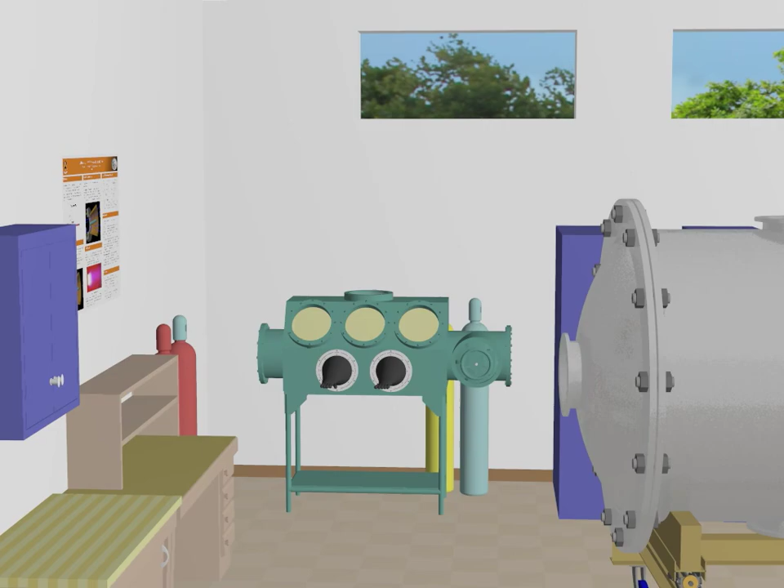I'm Will, and this is the second of 4 videos I've made summarizing the projects I've worked on here at Princeton. This video focuses on the thruster that I use for my research, as well as the thrust measurement system.

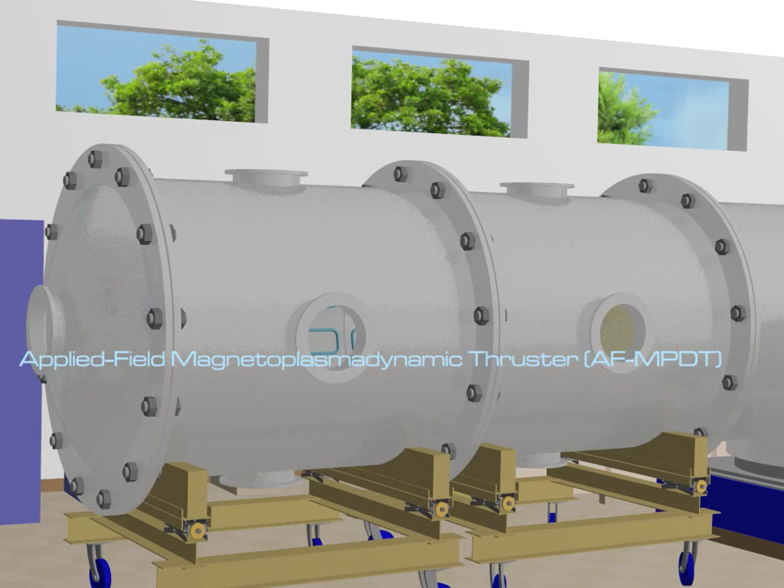I work on a type of high thrust density device known as an applied field magnetoplasma dynamic thruster, or AF-MPDT, sometimes also referred to as an applied field Lorentz force accelerator. But basically, it's a plasma cannon with a force field nozzle. We'll start by taking a look at how this thruster works, and then I'll tell you about some of the research I've done to determine how to make it work better.

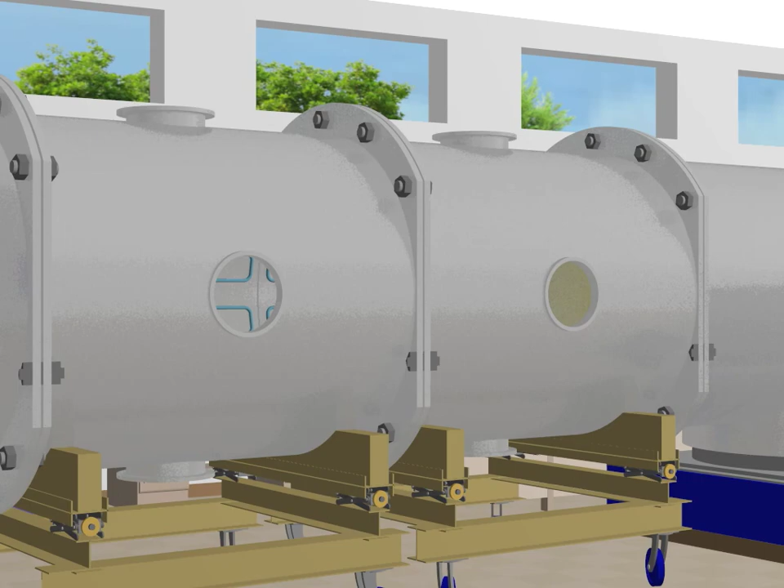Our thruster resides in a steel tank, and this material was chosen over fiberglass because we wanted to be able to handle as much as 100 kilowatts of power, and a lot of that power is going to heating the walls, which would melt fiberglass. You can see that the cooling lines are welded to the interior to keep it from getting too hot.

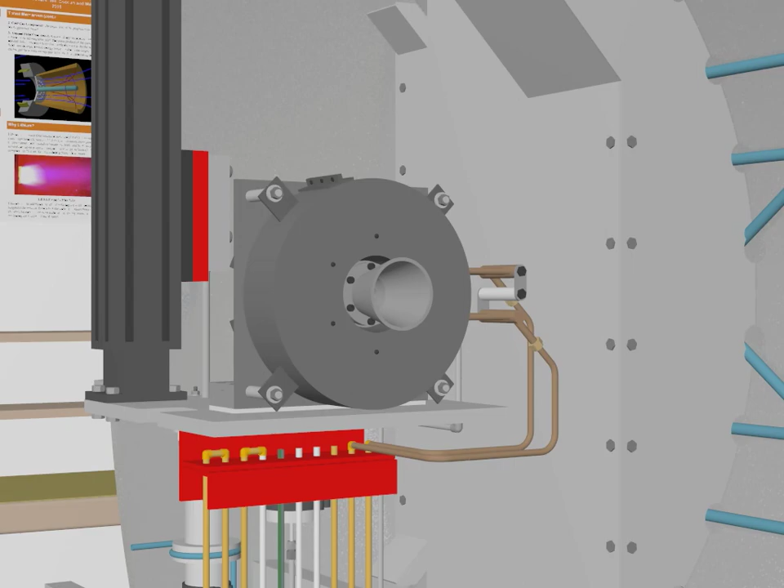I work with both lithium and argon propellants, but each requires its own thruster. This is the lithium Lorentz force accelerator, or LILFA for short. This is an electric rocket. The physical nozzle serves as the anode in the electrical circuit. The object in the center is the cathode. This particular cathode is known as a multi-channel hollow cathode.

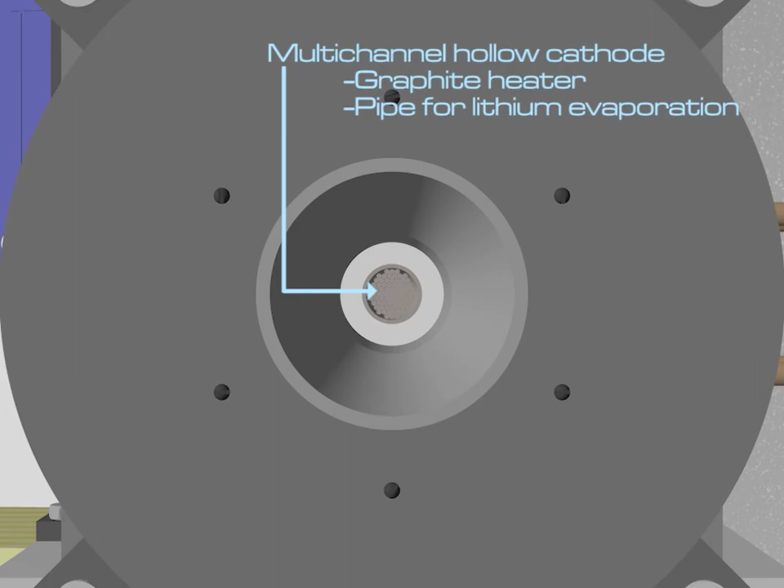Inside the cathode is a graphite heater, which causes the cathode to glow white hot before ignition. There is also a tube through which the lithium flows and where evaporation takes place before venting through the many channels. Both the anode and cathode are made of tungsten, since it has a higher melting temperature than any other metal.

Using lithium as a propellant is problematic for a researcher, since it is extremely hazardous, it takes a long time to clean up, and because it coats everything in an electrically conducting layer.

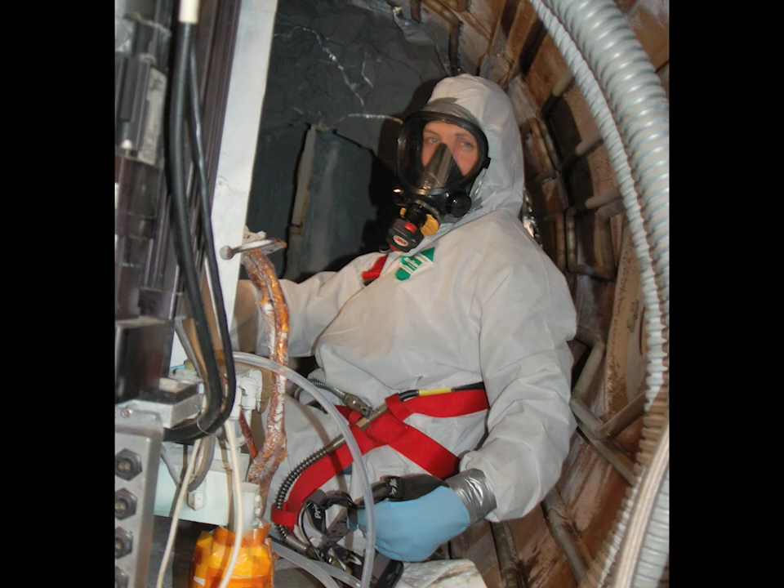But it offers an equal number of advantages for thrusters. In addition to having a low ionization energy, which means that more energy can go to thrust generation, it lowers the work function of the cathode. This feature is essential because without it, our tungsten cathode would melt.

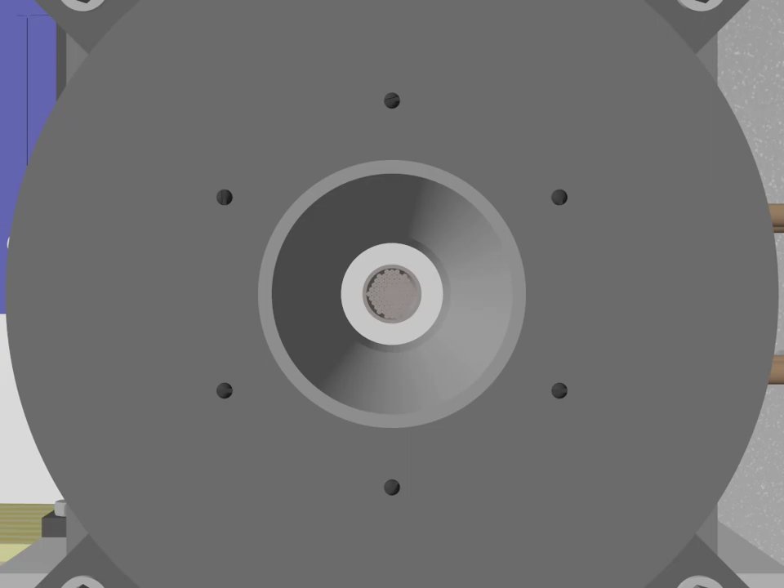How does the LILFA generate thrust? There are 3 different thrust generating mechanisms. First, just like in a chemical rocket, there is a hot gas expanding through a physical nozzle, generating the gas dynamic thrust component.

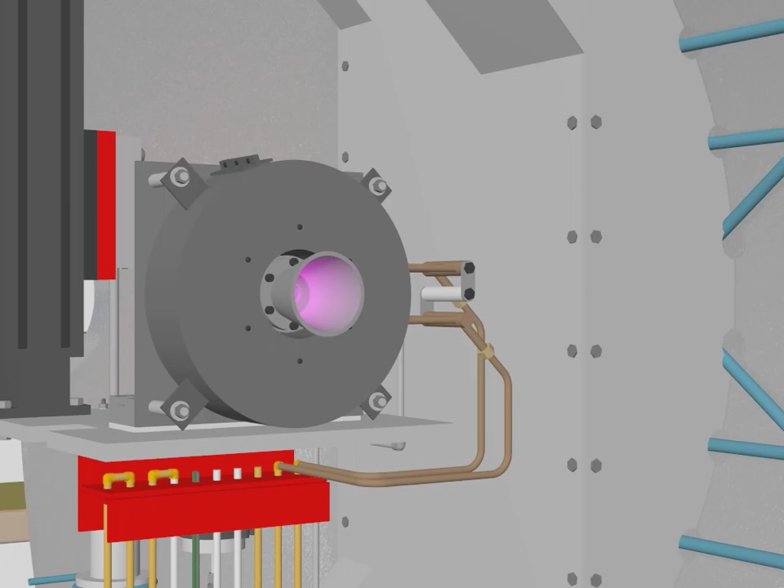When we strike an arc through the plasma and increase the current, it generates an azimuthal magnetic field. In this case, the Lorentz force, or cross product of the radial current and azimuthal magnetic field, is primarily along the thrust axis. This component of thrust is known as the self-field thrust, since it results from the self-induced magnetic field. You may have noticed the large cylinder surrounding the thruster.

This is a solenoid. It contains a copper pipe that has been twisted a number of times around the thruster. This pipe carries cooling water as well as large electric currents. These currents result in an axial diverging magnetic field. This is the applied field I referred to earlier.

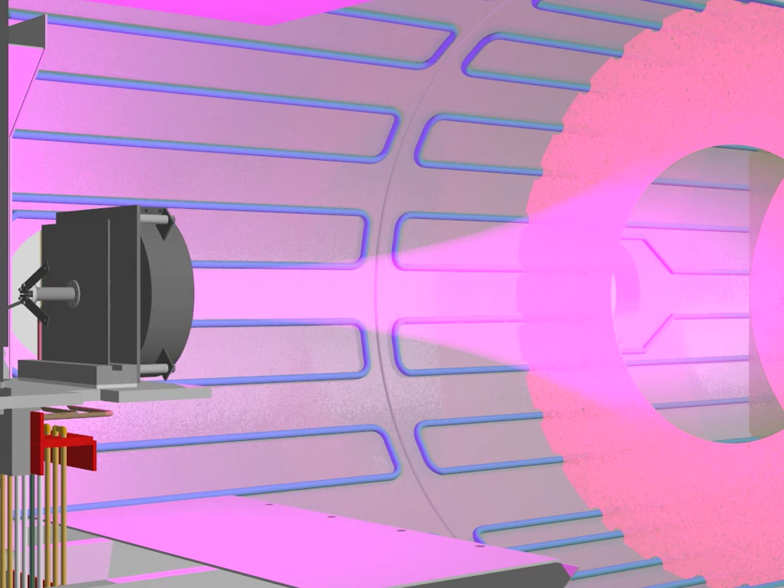It confines the plasma in what is known as a magnetic nozzle. You can actually see the boundary of this magnetic nozzle when operating at high magnetic field strengths.

In addition to extending the physical nozzle, the applied field results in a Lorentz force that acts to swirl the plasma. As the swirling plasma expands through the magnetic field, the rate of rotation slows in order to conserve angular momentum. In order to also conserve energy, that means the plasma must accelerate in another direction.

In this case, that is along the thrust axis, which results in the generation of thrust when the plasma detaches from the magnetic field. This thrust, along with any force resulting from Hall currents, is the applied field thrust component.

This last thrust component is the dominant one under typical operating conditions, and the one that has proven most difficult to model over the last 60 years of applied field MPDT operation.

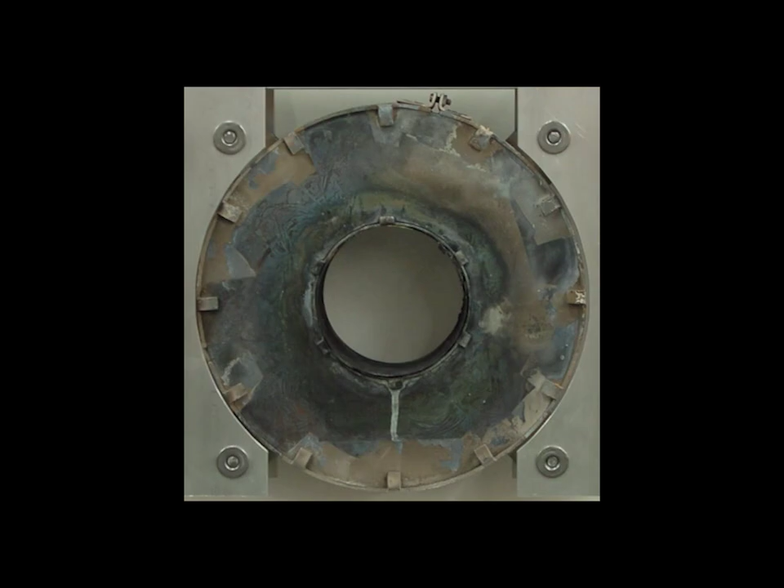We want a formula with which we can predict the thrust for a given power level, magnetic field, geometry, mass flow rate, and propellant species. We want this because such a model can be used to optimize the thruster for a given mission's requirements.

Many models have been put forward to date, and experiments suggest that thrust scales proportionately with the current, magnetic field strength, and anode radius under most conditions. However, prior to my studies here, all measurements in the literature were of the total thrust, which is the sum of all thrust components. Without perfect gas dynamic and self-field thrust models, it is therefore difficult to validate a model for the applied field thrust component from a measurement of the total thrust.

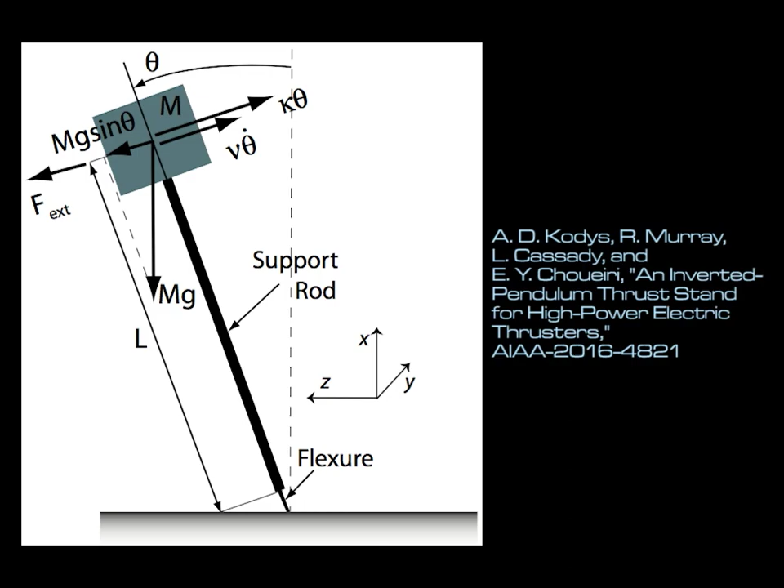I constructed a new thrust stand for the LILFA in order to make direct measurements of the applied field thrust component. This thrust stand operates on the principle of an inverted pendulum. When the thruster applies a force, the pendulum moves. I measure this motion and calibrate it against a known force to determine the thrust.

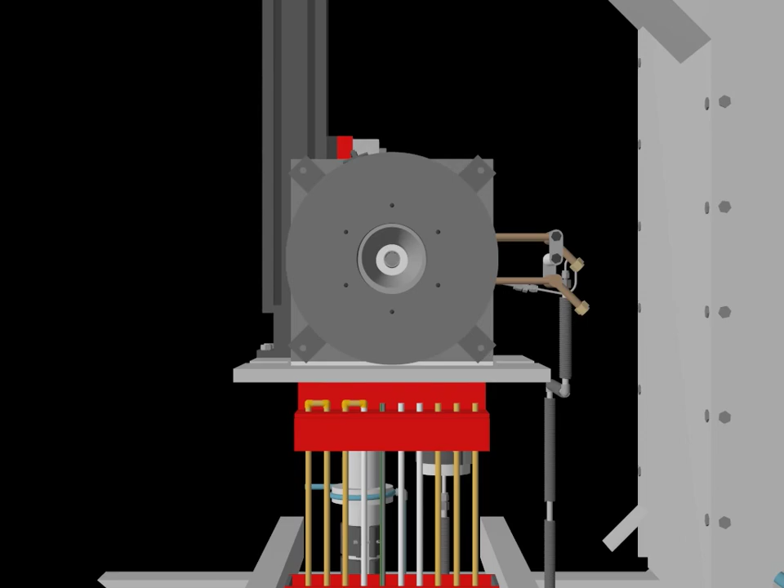In order to measure a single thrust component, I first fixed the thruster to the lab frame. Then I separated the solenoid from the thruster. Because the solenoid generates the applied field, the force resulting from that field must generate an equal and opposite force on the solenoid. The solenoid is then suspended from a structure supported by 2 copper pipes. These pipes carry all current and cooling and act as springs for the inverted pendulum.

Now, if I turn on the thruster with the applied field turned off, nothing happens. But if I increase the magnetic field strength, the applied field thrust component will cause the solenoid to deflect. I measure that deflection using both an LVDT and a proximeter, each of which is contactless.

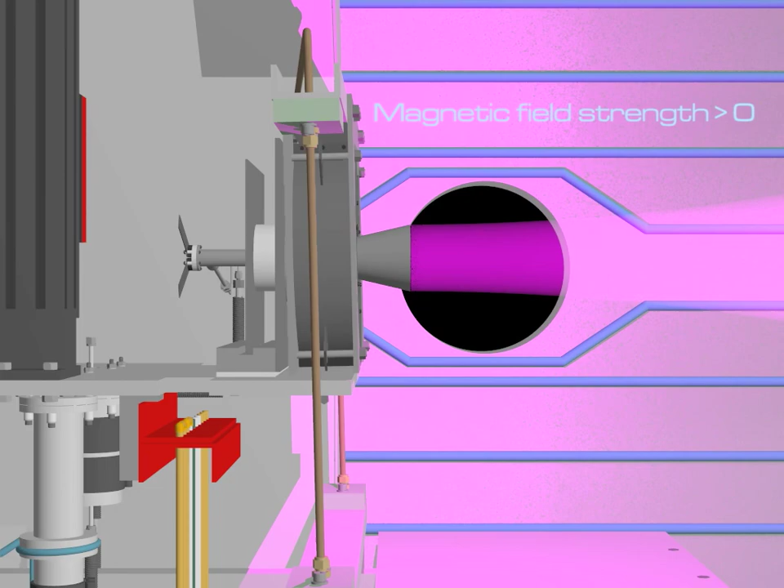In order to determine how that deflection corresponds to a force, we can apply a known force along the thrust axis. In this case, we have a thin wire traveling over a low friction pulley and down to a scale.

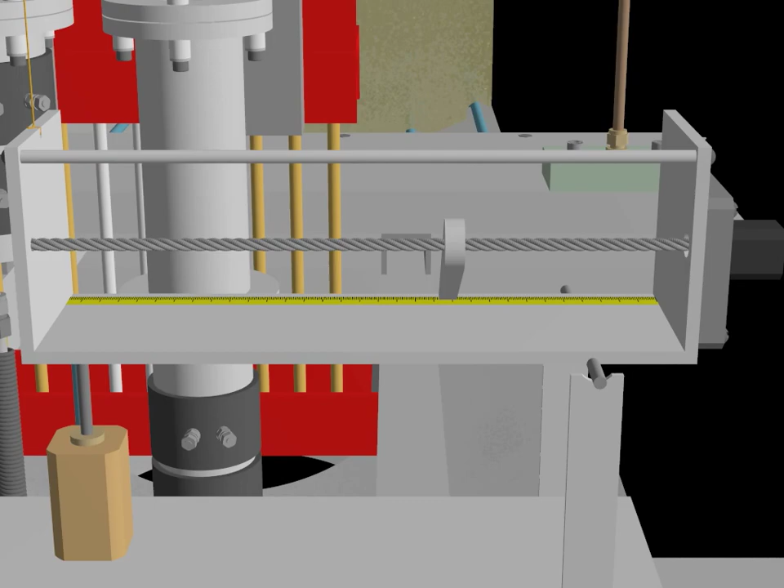That scale can be triggered by a remotely controlled actuator. The force applied to this scale is known as a function of the position of a mass, which is also remotely controlled, and which can be used to match the deflection found while firing.

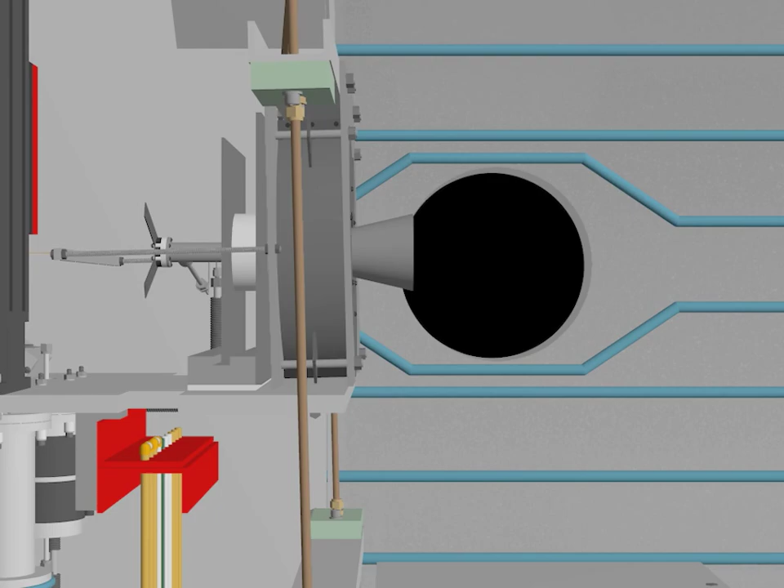That's an applied field thrust measurement in a nutshell. It's a little more complicated when you account for thermal drift and electromagnetic tare forces, but now you understand the basic principles. Using this thrust stand, I have shown the applied field thrust component to be dependent on mass flow rate, which had not previously been shown.

My theoretical work related to the applied field thrust is less suited to a video format, so if you are interested in that, you can visit our lab website at alfven.princeton.edu, where all of our papers are posted.

That concludes the second video. The next video will focus on measurements of plume divergence using a new type of condensation measurement device known as the dynamic resistance probe.